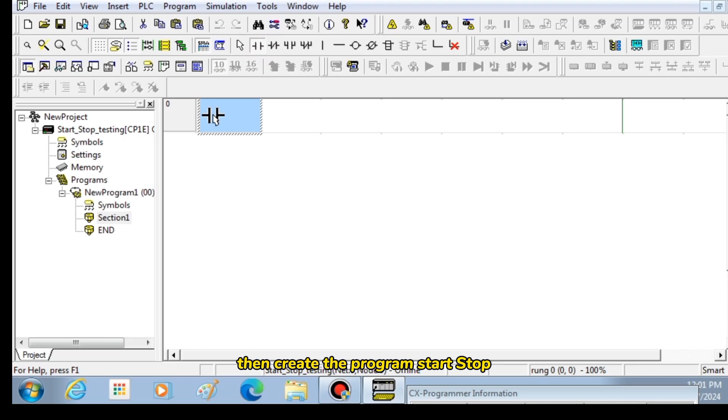The device of CPU is CP1E, E40, and then okay. And then create the program start stop. 0.00 is the input of Omron. And then 0.01 the start.

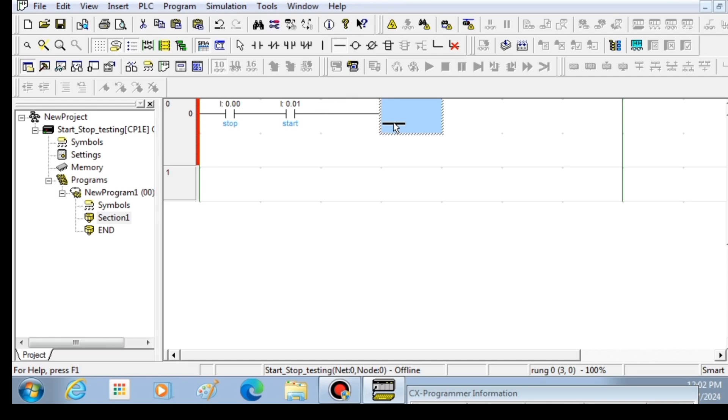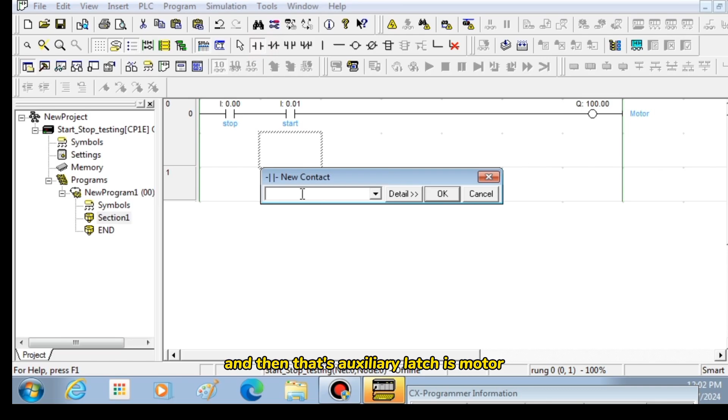The coil or motor is 100.00, motor, and then the auxiliary latch is the motor auxiliary contact.

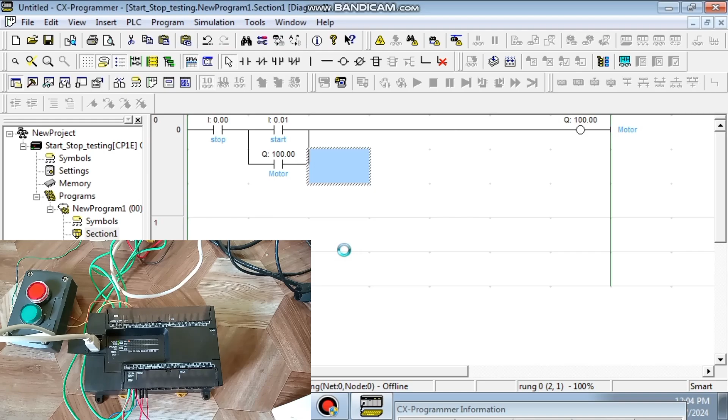And then we have CPU online communication. Yes, and then download the program. And then yes, we have a file from laptop going to PLC. Download the program, yes.

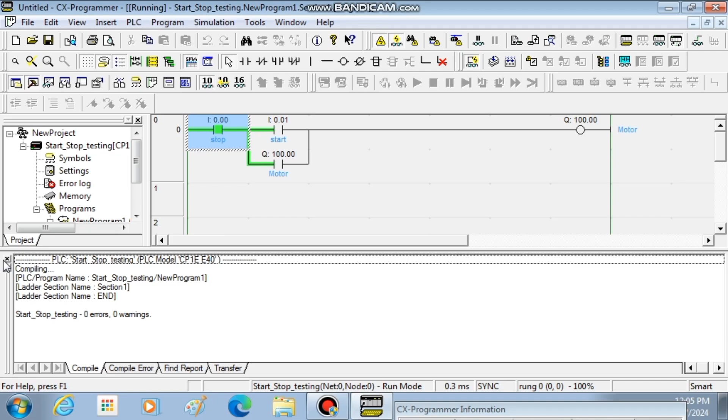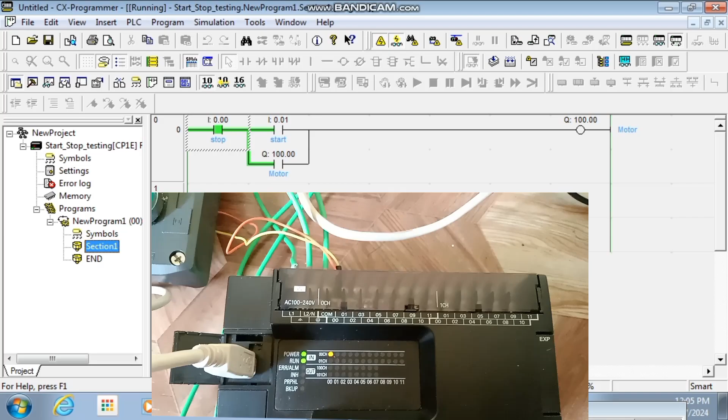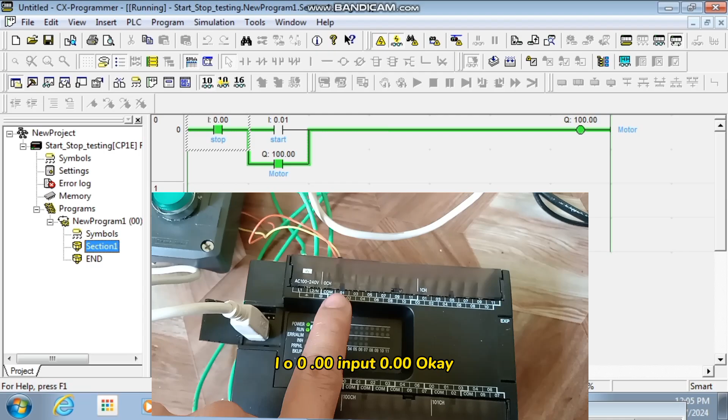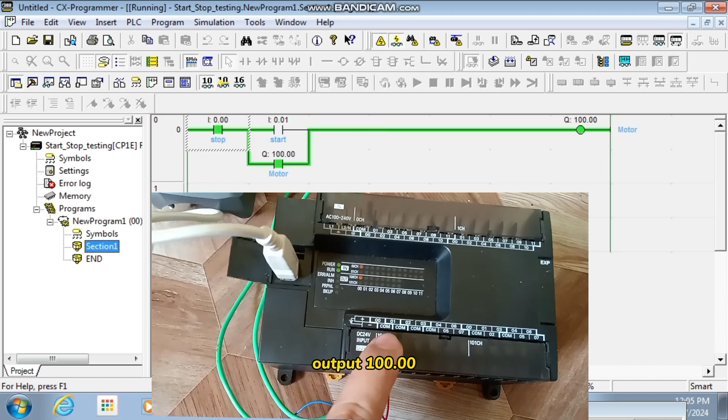And then for testing the start stop program, input 0.00. Okay, click the start, then see the program is okay. Output 100.00. Okay, the program is functioning. You see, save the program.